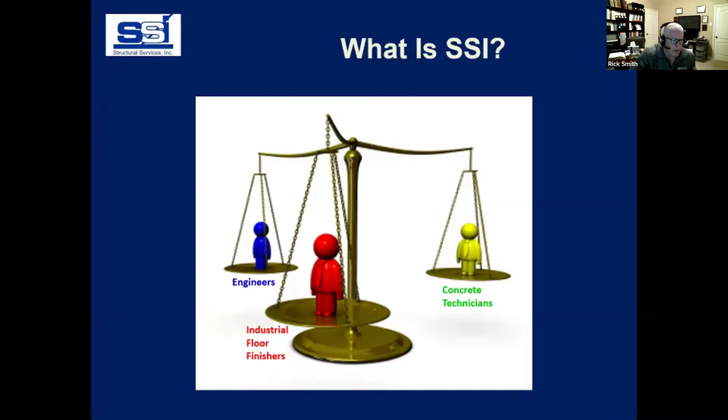We also show up at every project site that we are involved with, so we have boots on the field out there that are working with the floor finishers and learning some of the difficulties that we have with some of our design recommendations, and also some of the problems that we have with other designs. So our clients are numerous. We do 200 million square feet of industrial floor slab design and construction a year, and yet we're a team of less than 20 people. So a lot of involvement there, a lot of long hours and days, and a lot of square footage.

We're involved with a lot of the ACI committees. You can't open up one of the documents in ACI without finding our names out there. ACI 360, Design of Slabs on Ground, is one. That document is a guide. There is the ACI 302 committee, Construction of Slabs on Ground. We're either president or past presidents or chairmen of these committees. 117 on tolerances, we run into a lot of tolerance conflicts in concrete construction, so there's a document that we've served on in the past. And then also a guide for design and construction of concrete site paving for industrial and trucking facilities.

So the first thing we're going to talk about is the anatomy of an industrial floor slab. We've got our base materials that are local to the project site, and then our subgrade. In Ohio, you guys have a 304 material. You're blessed. If I could get crusher run 304 crushed stone everywhere in this country, I would not have near the problems I have, but you would be amazed at the variability in the base materials that are available throughout the United States. 304 is one of the best base materials I've ever worked with.

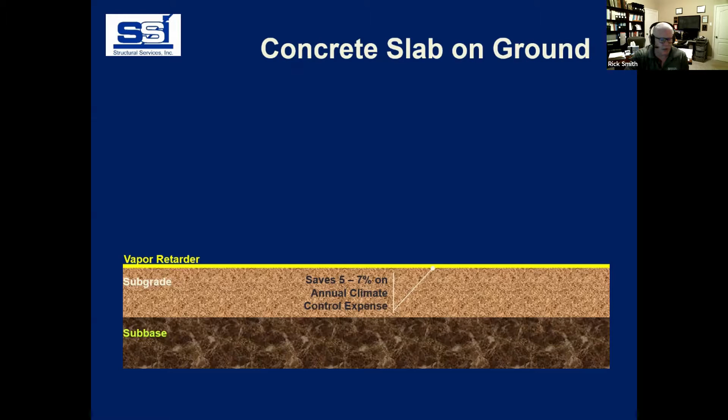Okay Bob, still hearing everything okay from your end? Everything's great, Rick, everything's great. Just want to make sure.

We have our concrete slab that sits directly on top of the vapor retarder. There's actually an ACI flow chart. ACI 302.2R has a current flow chart in it that talks about where the vapor retarder goes in various instances or different types of construction.

With our floor slabs, we have what we call isolation joints. We rarely have an expansion joint in the floor slab, but a lot of people refer to expansion joints in industrial buildings. Isolation joints separate the floor slab from our structural elements like our columns. They also separate the floor slab from our wall system. So we have those in the building.

We have construction joints, which are basically our day joints. This is the limits of our pour for a given placement. And we commonly do pours between 20 and 50,000 square feet. The largest that I've been involved with was 256,000 square feet in one day.

And that was a large project down in Dallas that we did for General Motors.

Then a lot of times we'll see keyways on industrial floors. We wrote keyways out of our industrial design documents probably 20 years ago, but we're still running into a lot of engineers that put this detail on here. Given circumstances today, we had a lot of problems with keyways on floor slabs as far as cracking off of the top side of the female portion of the key. So this was written out of our design documents years and years ago.

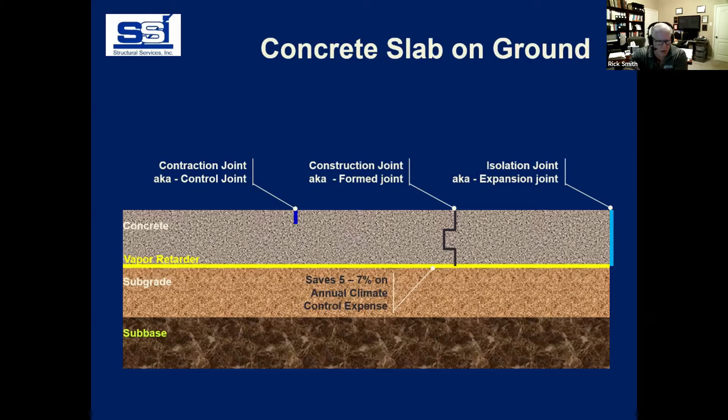So if you still have keyways on your structural drawings and details, we need to get those scrubbed off. Then we also have something called a contraction joint. We used to call them control joints, but that implies that we know what we're doing on concrete construction, and that may be a stretch sometimes. So we changed that terminology to contraction joint, because when we say control in a court of law, then the attorneys jump all over that, and contraction was just a much better way of saying we're trying to accommodate some of the shrinkage. If God's smiling on us and we do everything right construction wise, then we get this joint crack. So basically it's a straight crack that we can resaw this joint with a special saw to clean the vertical faces and fill it with a semi-rigid filler, which is the cheapest way to fix a crack in the floor slab, if you will.

If we don't do it right, then we get some of these things called out-of-joint random cracks, and that's typically what our clients complain about. Random cracks are misunderstood in our industry. If you do them right, in other words, if you over-reinforce the floor slab and produce numerous tightly spaced cracks, that's not a bad design. It's just cracked, and a lot of our clients, especially retail clients, just don't like to see cracks. So we'll talk a little bit about that when that may come into play.

Let's drop all this stuff out of here and let's talk a little bit about the components of the floor slab from a structural perspective. All industrial floor slabs subjected to traffic should have some type of load transfer mechanism in there. First, we have a load transfer mechanism at our formed construction joint. And then secondly, we generally have a load transfer mechanism at our sawn contraction joints. Now that can be a dowel basket or it can be light reinforcing steel.

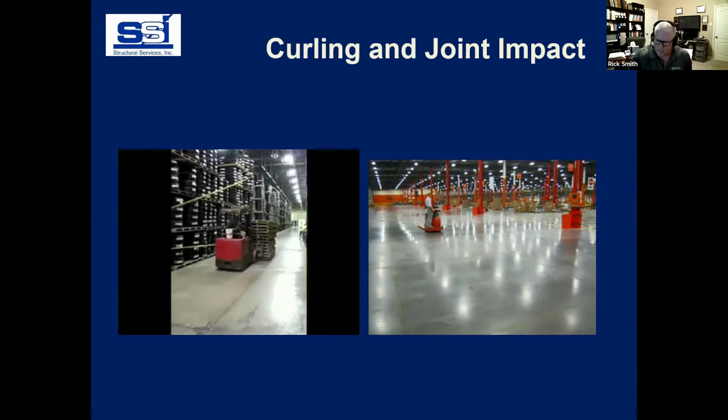And one of the reasons why I wanted to show this - did you hear the clicking noises? The clicking noises are those lift trucks going over the joints. In the first video that was running, the floor had no load transfer in it. So all the joints were faulting and the lift trucks were riding over the joints. The slab was compressing on one side of the joint and it was hitting the bump. The operator was seeing a very poor ride. On the second one, we actually had a pallet rider that was running over the floor slab, and that pallet rider was destroying those joints within 7 months. So it's very important that we have positive load transfer in those floors.

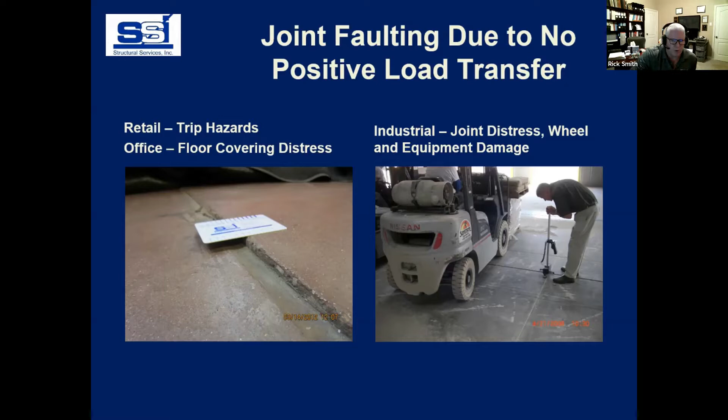When we look at floors, obviously an unreinforced floor with no load transfer is the least expensive project to build, but it's the most expensive to maintain. So it's very attractive for speculative warehouse construction, for developers that are out there trying to hit a lease point as far as leasing the building, a cost per square foot.

But you can see the kind of problems that we run into. We get a sophisticated material handling client in one of these buildings, the joints end up getting beat up. We end up with corner repairs in the form of structural nosing repairs, and we end up with wide joints in the floor slab that start to widen out.

Then we have repair contractors that use the wrong type of joint fillers to fix those. And if they do use the right type of product, like a structural nosing repair, honor the joint with a semi-rigid filler, which is the photo on the left, then you end up with a very expensive repair. These repairs will run $30 to $60 a lineal foot.

On the right, we're actually showing that type of repair, a structural nosing repair that was done to the joints that were spalling. If you notice the arrows pointing to the pins, those are actually ports that were used to permit the undergrouting to occur. So this particular floor slab had 3/8-inch pilot holes drilled through the floor, alternating, and they pumped in a two-part modified foam to basically expand and reconnect the bottom of the floor slab with the top of the base materials.

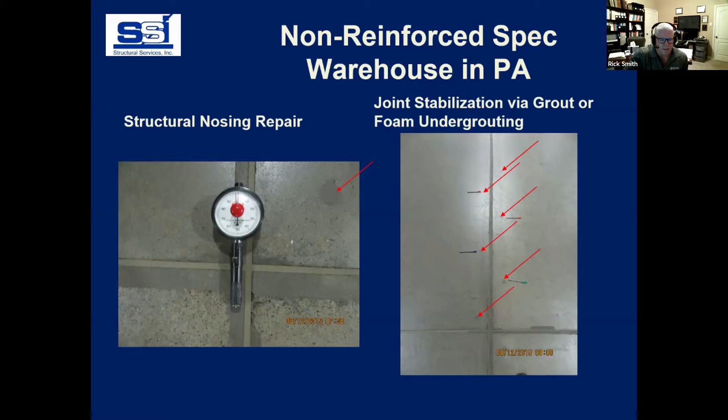So if you do the floor slab improperly as far as the design work, you can add $1 to $2.50 a square foot to repair those floor slabs.

So many times those floor slabs, we talk to clients and they say, well, dowel baskets are too expensive, or nominal reinforcing is too expensive. And we'll say, well, how much? And they'll say, oh, it adds 50 to 75 cents a square foot. And then we say, well, we're looking at $1 to $2.50 a square foot to repair the floor slab downstream if we don't do that.

So be very careful when you're looking at these first costs and comparing your options, because it can be very, very expensive to repair in the future.

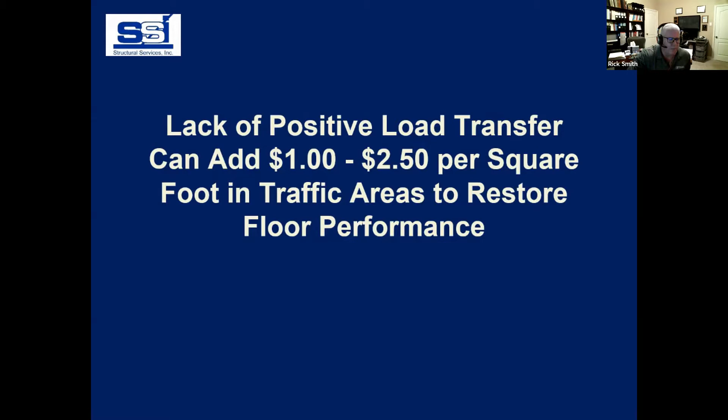If we use dowel baskets in the floor, I always stake them. I never allow the contractor to plop these things, and you'll see here the ready mix concrete hitting the top of the base. Any dowel basket that's in that path is going to basically float like a surfboard, or get moved like a large wave hitting somebody standing in 4 feet of water.

So we always want to stake those baskets. You can see in the photo on the right they have spray paint and string lines down to align the baskets, and the baskets are staked.

The other thing we do is we never cut these tie wires. There's been a little controversy about that in our industry - are those wires too much restraint? I can tell you they're not, on an industrial slab that's got joints that are 15 feet on center or less. We've never had a problem with those restraining activation of the saw cuts.

Leave them in. That keeps the basket properly aligned, and it also prevents those plates or round dowels from falling out. So here on the left, I got called to a project in Tracy, California, where 45% of the joints in the speed bay were unstable, and the floor had baskets in it.

When we ran ground penetrating radar across the floor, we found 45% of the joints where the basket was not in its right location. So you can see the saw cut up here at the top where the arrows are pointing, and there's the basket that's about 3 feet away.

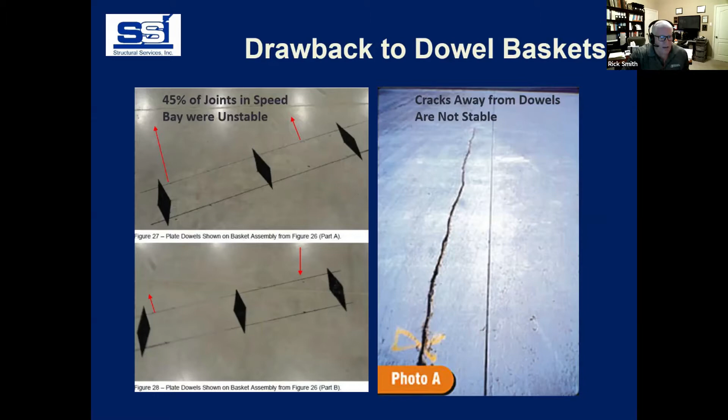So we spent a lot of money putting the baskets in the floor. They didn't stake the baskets - they just poured right over it, and the baskets slid. And when the baskets slide and misalign, then you've got a risk of getting the crack outside of where the dowel is. And now you've got a crack in the floor slab with no load transfer stability. So that's always a risk.

Another way we can put load transfer in a floor slab is nominal reinforcement. ACI 360 gives us a couple of options for that. Anytime we nominally reinforce the floor slab, notice I'm toggling here showing the construction joint widening if I put that in there. Reinforcing does nothing until the concrete cracks. Once the concrete cracks at these saw cuts, it's going to hold the saw cuts tighter than a floor that does not have reinforcing in it.

As a result of that, it sends a disproportional amount of shrinkage to the formed construction joint. That's called a dominant joint. So this joint at the saw cut may open up. Initial opening will be 1/8 of an inch due to the saw cut, and maybe an additional 1/16 to 1/8 of an inch of movement. And then this construction joint can actually open up 1/2 to 3/4 of an inch in width. I'll show you that in a minute.

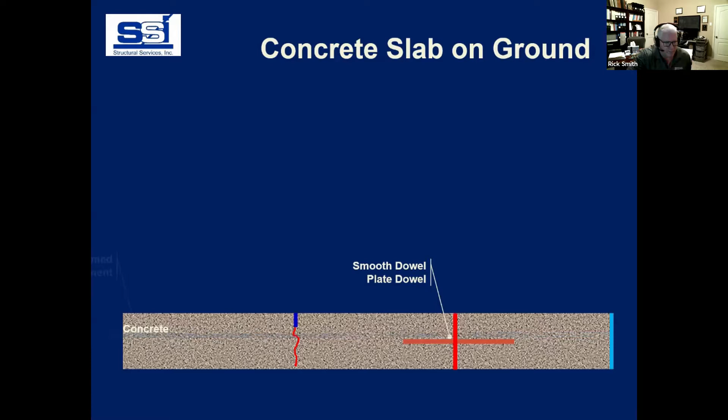With fiber reinforcement, it's a very similar function. Whether this is high volume polymeric fibers or steel fiber reinforcing in 40, 50, 60 pound per yard dosages, once you put that amount of fiber in the slab, you're basically putting little tie rods across these in-joint cracks, and you're forcing that movement to another location in the floor, here again, the formed construction joint. So we've done a great job eliminating restraint in the floor slab, but it's come at a cost, and that's these joints that have opened up.

Just want to illustrate some of the problems we've had in the past with buildings where we've had dominant joints. This is a large warehouse out in Pittston, Pennsylvania. One thing I'll tell you about Pittston is they have limestone you can import from the Philadelphia area that has low shrinkage characteristics, but they also have sandstone in this market that's the predominant material. The sandstone has about twice the shrinkage that the good limestone has. So unfortunately, we ended up with a spec mix with sandstone, high water demand, and high shrinkage characteristics.

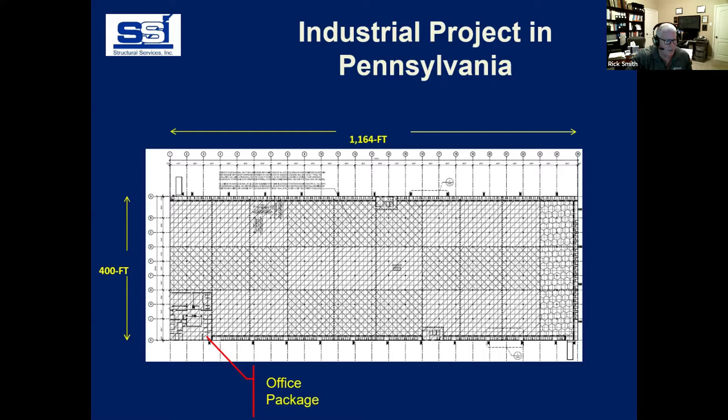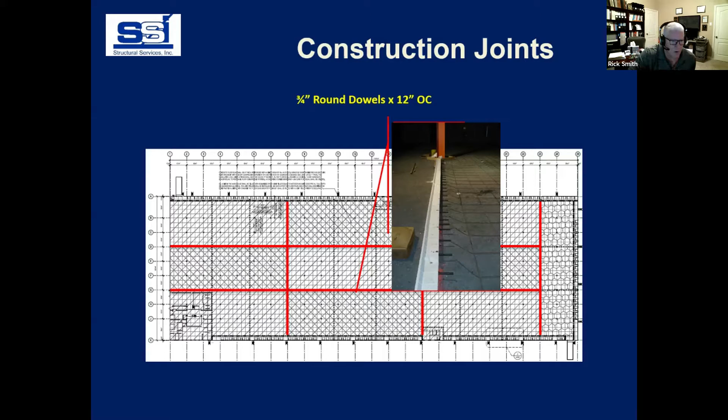So the building itself was laid out into, let's see, 10 placements. These red lines here are construction joints. We poured these left to right across the building. At all these red lines, we had dowels, 3/4 inch round dowels, and they used a system called a laser form, which is a partial depth form. Not a big fan of these types of partial depth systems myself, but the contractor used it and it was okay.

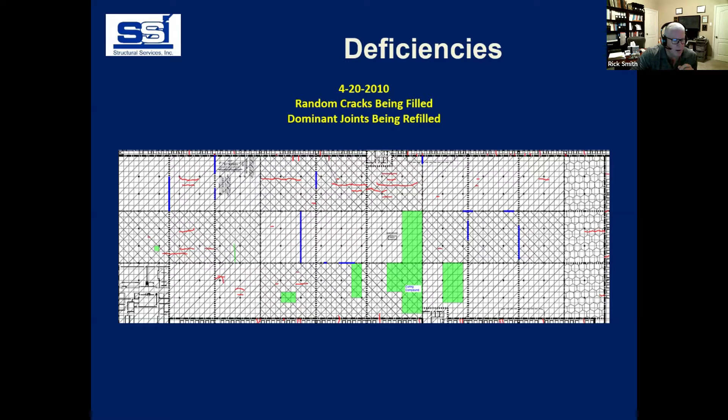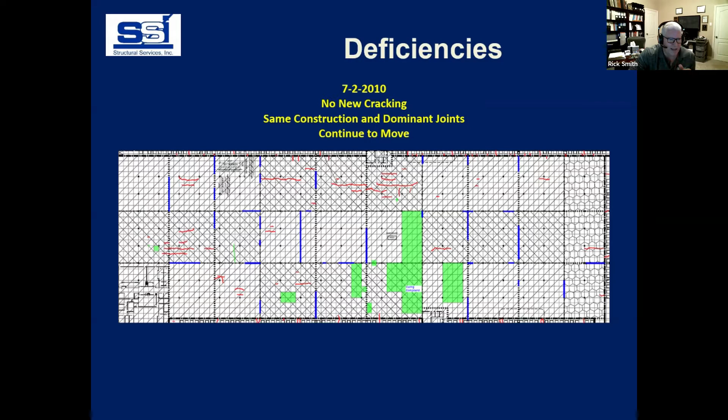But then we started seeing these areas with the blue where we started getting what's called dominant joints in the floor slab. And every 3 months or so, I got called back to the site again, and I had to continue repeating my visits until basically every dominant joint in the floor, every 125 feet, had opened up. We went in and filled these joints in the summertime, sometime around August. And after we filled those, I got called back in to troubleshoot the joint filler that was actually extruding out of the floor.

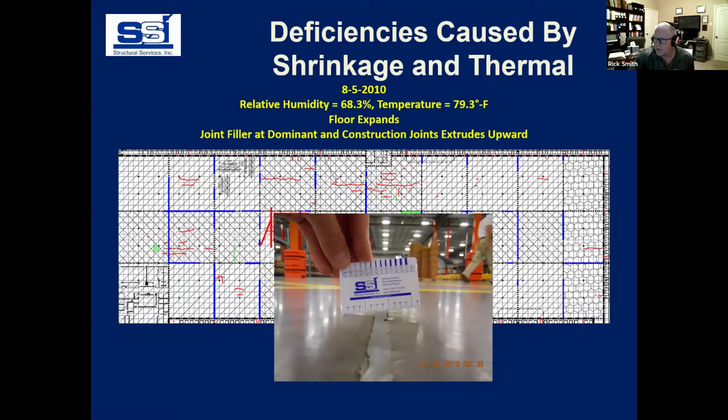So what we found is that the sawn contraction joints opened very little. Then any type of thermal warm-up that the floor slab experienced all channelized to one location every 125 feet. That caused the semi-rigid joint filler we put in the floor to bulge out of the floor, where the lift truck was more than happy to come in there and shear it off. So be very careful about discontinuing your reinforcing in a nominally reinforced floor slab. You can run into some significant challenges with that.

Also at the construction joints, which are these purple lines running here, we ended up with joint filler that sagged and dropped, and we ended up with some wide joints that curled. We had to come in and grind those down.

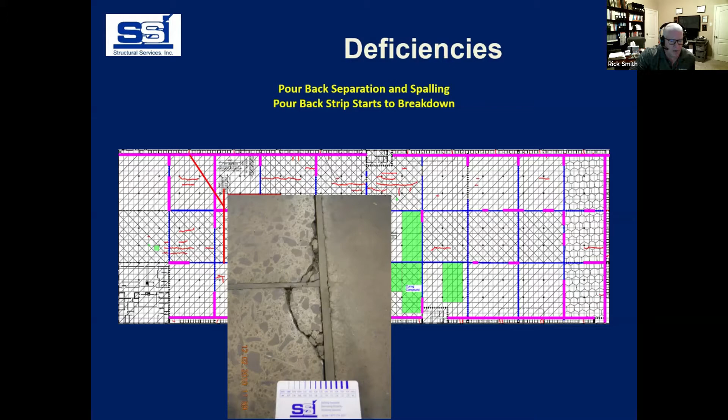You can see the lippage that was occurring here, and then we started to see joint spalling. All of this occurred within 1 year of this project going live. You can see here the joints are actually half an inch in width. So we had two forces at play.

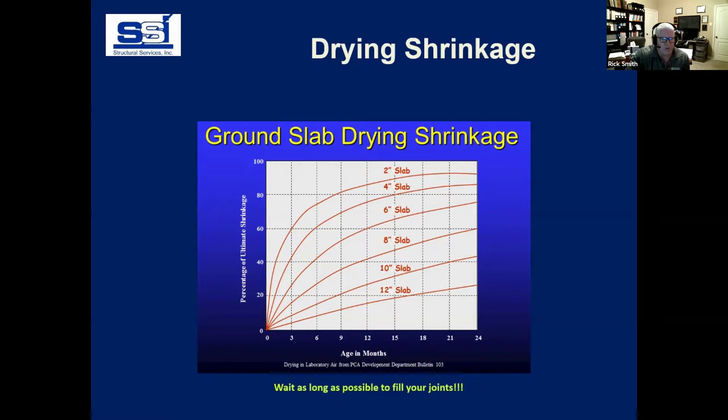We had drying shrinkage in the floor slab, which takes years to release in an industrial floor. For an 8-inch thick floor slab, we might be looking at 40 to 42% of the drying shrinkage in the first year, and then perhaps 60% after 2 years. It starts to tail off after that, but in the first literally 6 months, we see a lot of that shrinkage occur, and then it just slows down. So give yourself some time and do not expect that you're going to fill these joints one time. This is a multiple step process.

The second component we were facing was thermal. The one thing we cannot fix with any shrinkage reducing admixtures or any of this technology out there for limited joint floors is we can't change the thermal properties of the concrete. It's going to expand and contract based on the type of aggregates in that concrete and where you're located in the country.

I've probably got more floors instrumented in this country than anybody as far as slab surface temperature, humidity, dew point, and ambient temperature. I monitor these buildings from time to time and go look at the readings. You can see here in Jacksonville, Florida, the temperatures range between 62 to 83. Then if you look at Florence, it's somewhere between 60 and 74. It's a 14-degree delta between those two, almost a 20-degree delta from Jacksonville.

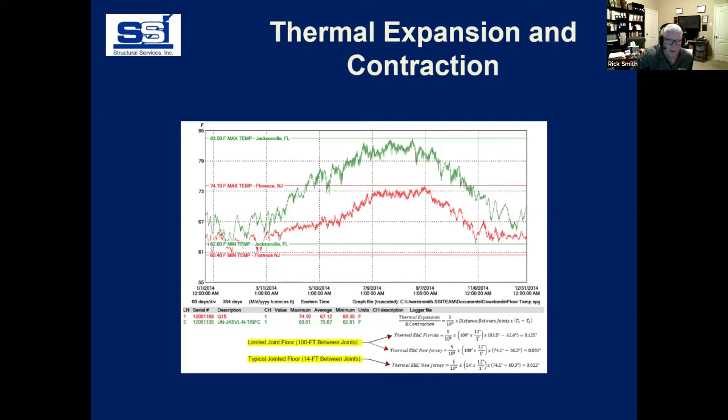So that thermal expansion will release between your joints. If your joints are 100 feet apart, it could cause an eighth of an inch movement. If your joints are 14 feet apart, maybe 12 thousandths of an inch movement. So thermal becomes a big player when you're doing limited joint floors.

ACI doesn't cover a lot of this in our committee documents because we assume you're saw cutting those slabs 15 feet on center or less. Here's the old rule of thumb: 24 to 36 times the depth of the slab, and joint your slab accordingly. When I was in the steel fiber business, we commonly jointed slabs 25 and 30 feet apart. And did I get into trouble?

So we have a lot of people coming at us saying, hey, we want to get rid of the joints. We understand this is the hot thing to do in our industry. How do we do that? Here's a floor slab with 50-foot columns, 12.5-foot joint spacings.

Then you start to look at your shrinkage over the 50-foot versus your thermal over the 50-foot. Here again, you've got your 50-foot column spacing, looking at shrinkage, which might be about 0.4 inches, and thermal, which might be 0.04 inches. Then you look at maybe going 150 foot by 150 foot. Now you're looking at over 1 inch of shrinkage and an eighth of an inch of thermal contraction and expansion.

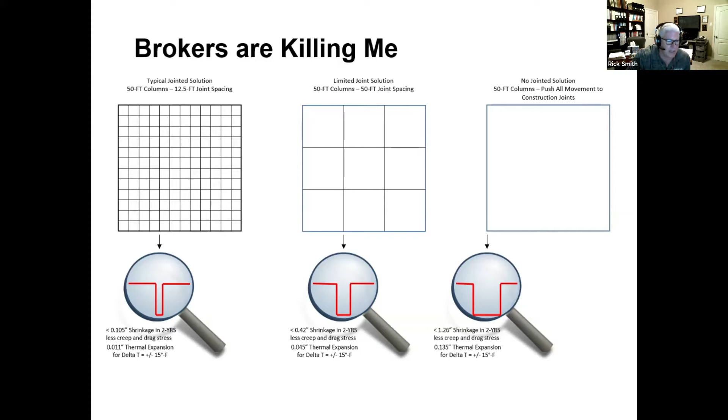Now, the shrinkage eventually is going to slow down and stabilize, but that thermal expansion and contraction will never stop unless that building is climatized, meaning held within about a 3 to 5 degree delta. So be very careful here, because with a tightly jointed floor, we may have to fill a little separation that occurs, and that's eventually going to go away after 2 years. But with these wider joint floors, 50-foot and 100-foot spacing, you're going to have movement that will continue to occur and release at those joints.

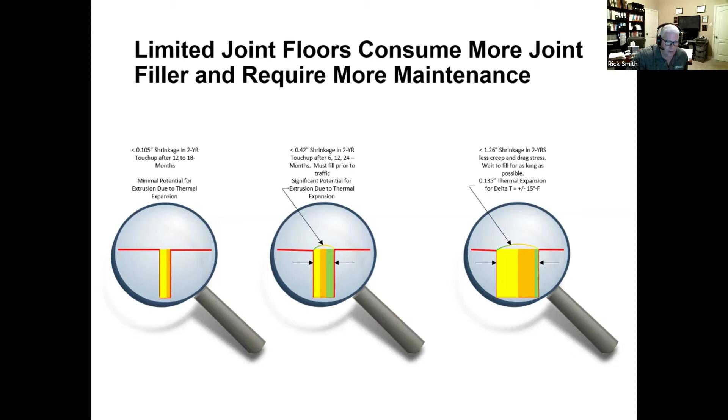So you want to put those joints in areas of the building where they're not going to see traffic, or you need to be prepared for that if it occurs. Okay, so we were talking about reinforcing. Let's talk a little bit about how much reinforcing.

Well, the buildings are getting taller, but we generally don't size reinforcing for the thickness of the floor slab. In other words, if the loads are increasing, I don't change the amount of reinforcing that I'm putting in there for a 6-inch slab.

So as we see the buildings hitting 36 and 40 feet clear, the number of pallets you can put in those racks increases. And we're commonly seeing, and I've been running these stress calculations now over 30 years, 7 and 8 pallets put in these racks. And we've got forklifts that'll lift them up that high.

A lot of our clients design their floors for 2,000-pound pallets. And at 2,000 pounds, you're just not going to see 6 and 7-inch floors out there that'll carry those loads anymore. So the new standard that we're typically seeing is an 8-inch slab with about number 3s at 16 inches on center in it, or an equivalent 8-inch slab with dowel baskets or something similar to that.

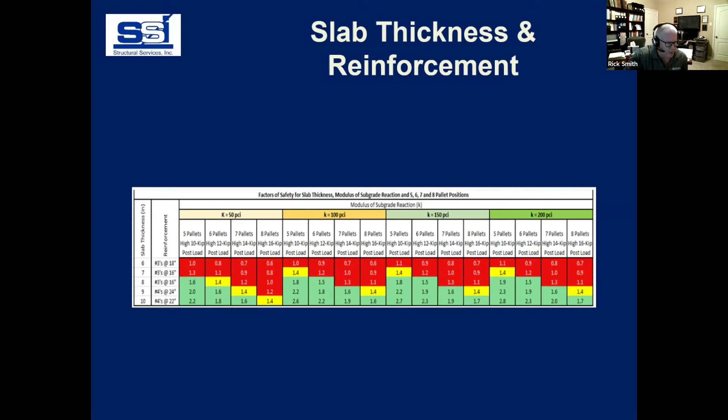But ACI gives us guidance on what to do if we're using light reinforcing, this 0.1% steel that you see, or number 3s at 16, number 3s at 18. It tells us to joint the floor slab 15 feet on center and put that reinforcing steel in the floor and locate it at a position where you're not going to saw cut through it.

ACI also gives us guidance on how to produce limited joint floors that have no saw cuts, purposely installed saw cuts, but are designed for serviceability. So basically a floor slab where we want millions and millions of tiny, tight little cracks in it. And there it tells us to go to the 0.5% cross-sectional area steel.

What ACI doesn't tell us is what to do in between. There is no guidance in our committee documents that says what to do if you're using between 0.1% and 0.5% steel. So we call this the courthouse zone. And we commonly run into floor slabs that are designed with code minimum reinforcing, 0.18%, and these are right smack dab in the middle of the courthouse.

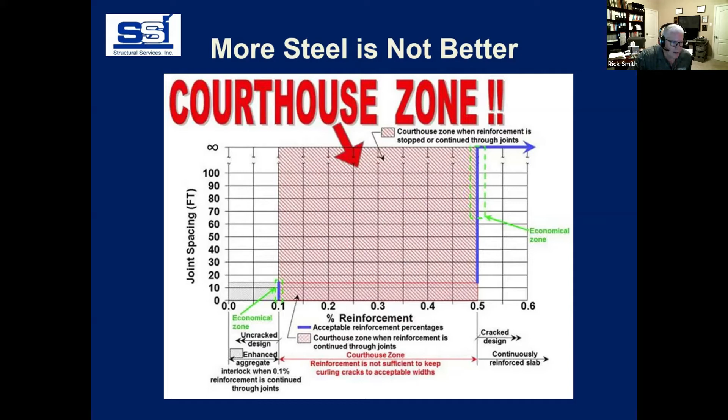Here's an example of what happens in a courthouse floor. Number 4 bar, 18 inches on center in a 6 or a 7-inch thick slab. The saw and contraction joints never activated. You can see that the reinforcing steel was jacked up in the floor slab just a little bit, and they got some settlement cracking over the bar. You can see where every rebar is in that floor slab.

Now, the good news is we'll never have to refill these joints. The bad news is sawing out and filling these cracks will run anywhere from $9 to $15 a lineal foot. So it gets very, very expensive. And this entire floor slab, 1 million square foot, had 16 miles of out of joint random cracks in it. So you can do the math yourself.

So limit the amount of reinforcing steel to less than 0.1% if your intent is for that saw cut to activate. And if your intent is to get rid of the saw cuts, jack it up to that 0.5% reinforcing steel and do away with them. But stay out of the courthouse zone.

Okay. Anytime you reinforce the floor, you force that disproportional amount of movement to the construction joints. This is a tilt-up building in Dallas, Texas, with a vapor retarder poured under a portion of the building. I've got lateral load path steel connected to the tilt-up panels in this first bay. So all the movement that was occurring in that first 100-foot wide pour released at this construction joint right along column line 3. And it opened up 13/16 of an inch in width.

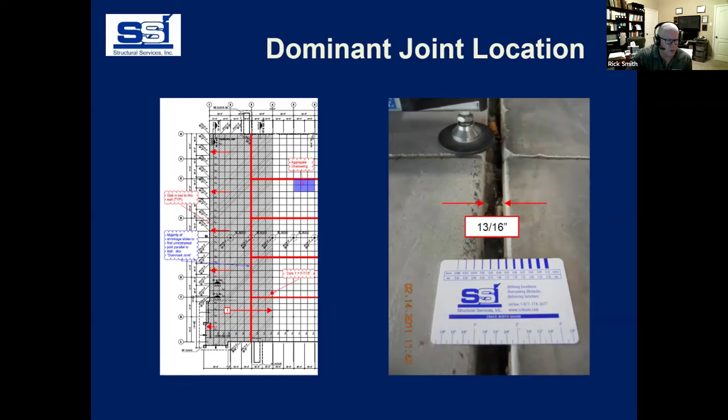I do not have a joint filler on the market I can stick down in that floor that is going to take that expansion and contraction and then that additional shrinkage that's going to occur over a time frame. So I'm forced to go in there and rebuild those joints with a structural nosing repair material at a cost of $30 to $60 a lineal foot.

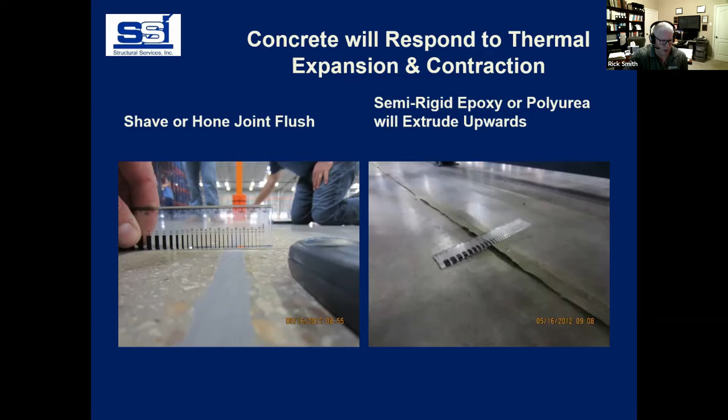So that's what we ended up doing on portions of this floor after we tried numerous times to fill the joints with different products. And then we saw that joint filler actually extrude up out of the floor. For that reason, we developed what we call the hybrid joint. Anytime I do a reinforced floor, I lightly restrain the construction joints with a little bit of reinforcing steel.

So if I've got plate dowels in the floor slab, 24 inches on center, I alternate those plate dowels with a number 3 rebar to basically force the shrinkage back into the saw and contraction joints, and a little bit of that shrinkage can accommodate itself at the form construction joint.

So we've been doing this for the past 6 years on every one of our big industrial projects, and it's working lovely. I've had 4 failures to date. We understand why the failures occurred.

We allowed some of the engineers to space these out 36 inches apart. That was too far apart. We overstressed the bar and snapped it. And once you broke one rebar, it was like a zipper. It went down the entire construction joint and the joint overactivated.

But this joint has been working very well for us. It's used on all the Home Depot, Amazon's large distribution boxes that we have out there today.

As I said, you can over reinforce the floor with 0.5% steel. We do that when we're pouring F-min floors or super flat floor slabs. We don't want any saw cuts in those because we don't want any curling at the joints, and we want that floor to have perfect rideability.

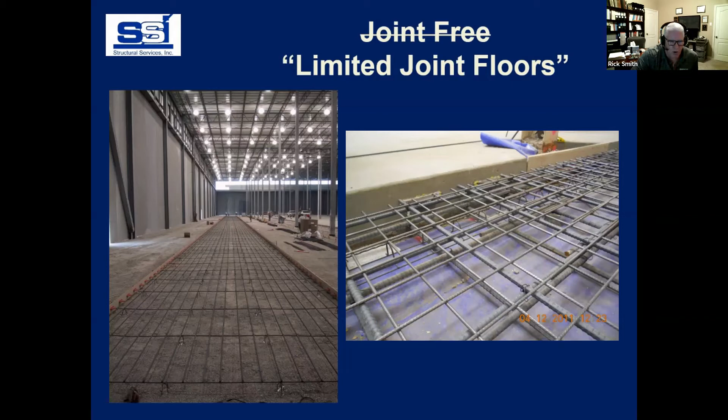Longitudinally and transverse, or left to right over the wheel path. Also, we get involved in floors that are heavily reinforced if we've got steel wheels or very, very hard wheels on the floor and we can't get in there to maintenance the floor.

So here's an F-min floor on the left where we can see the forklift is extended, and what we're trying to do is prevent that forklift from running into the racks. So we have that floor poured very flat and very level.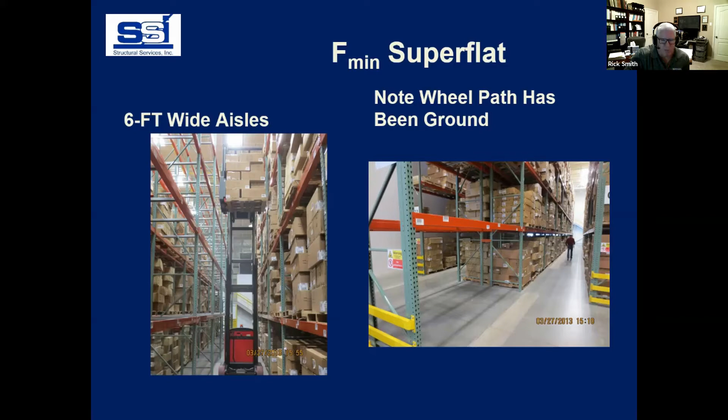And then that same floor over here, you can see the grinding marks that were done in the aisle to bring that floor in compliance. For those of you in pavement design, you might call that IRI, your international roughness index. We use the same type of equipment that you guys use to measure those floors. It's called a profilograph.

As we get into these taller buildings, one area that we're getting into trouble with are overturning moments. And as these buildings get taller and taller and taller, we're seeing very high uplift forces in these floors, especially in high seismic areas. So something I just want to point out to you.

A lot of our clients come to us and they say, hey, we want these racks to be designed for 2,000-pound pallet loads throughout, or 2,500-pound pallet loads. And so we'll ask the question, how many of these pallets do you receive on a given day that are going to be that heavy? And well, that's a good question. So they'll go back and they'll do the math.

So here's a building where over 5,000 pallets that are received are between 1 and 600 pounds. And then only 23 pallets out of all the pallets that came in there were between 2,600 and 3,000 pounds, and only 62 in the entire building were over 3,000. So we're like, why would you design the floor slab for a 2,500 or a 3,000 pound pallet load if the majority of your inventory was in the 1,000 pound pallet load or less?

So be very careful about that, because these particular floors with these high uplift stresses can require 8, 9, and 10-inch thick slabs when we only need 7 or 8-inch slabs to carry it.

So if we know that we're going to have these heavy pallets, ground stack them. So instead of putting them in the racks, we put some labels on the racks to basically say any pallet that's over 2,500 pounds goes on the floor, not into the racks.

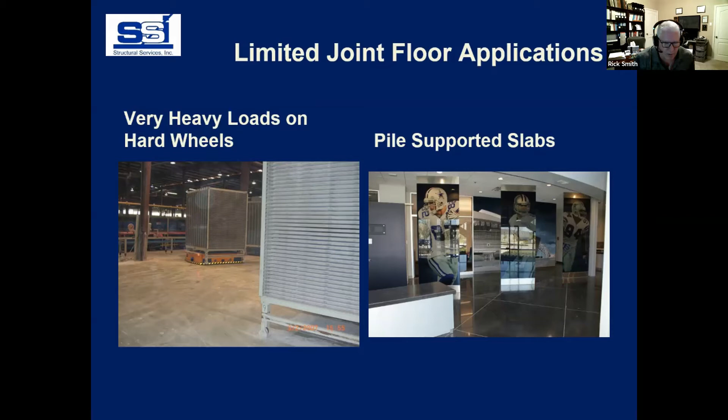Another thing that we're running into are ground improvement sites. Floors that are built on controlled modulus columns, stone columns, wood piles.

These types of floor slabs need bottom reinforcing so we can span between pile to pile or rigid inclusion to rigid inclusion. We load this type of floor slab up, and this particular floor has number 7s at 10 inches on center. It's got 65 pounds per cubic yard of steel fiber reinforcing.

We use a special joint along our free movement joints that is basically shaped like a sine wave. That joint's allowed to open, and there's a stay-in-place keyway, a metal keyway, designed for load transfer that I can rest my semi-rigid joint filler on. So we're seeing a lot more of this type of design coming out, especially where we're getting into these ground improvement sites.

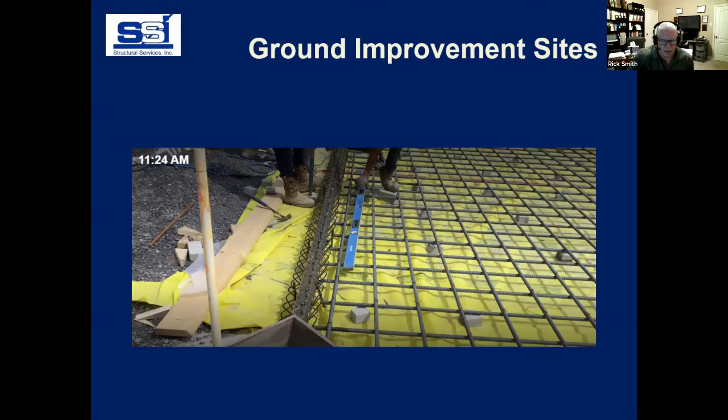And of course wouldn't be complete if we didn't talk about one of the largest e-commerce companies in the world. This is an Amazon industrial floor slab. We do all of the Amazon projects.

The slabs on ground are poured normal with joints in the floor slabs, but the suspended slabs are heavily reinforced. Beams on an 8 to a 10 foot spacing with an 18 gauge, 1.5 inch deck, 6 inches of concrete, 4x4 D11 to 4x4 D14, I think is about the biggest that we've gone on these. And then 7.5 pounds of macro synthetic fibers per yard of concrete to help control the cracking on these decks.

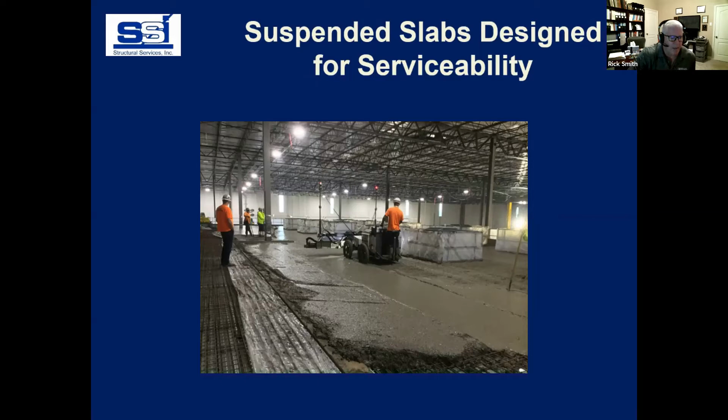And actually when we pour these, this is our expansion joint here. We actually pour right across the expansion joint with a fake wood form in it temporarily, come back in and cut that form out. Then we come back and put in a Watson Bowman armored joint there.

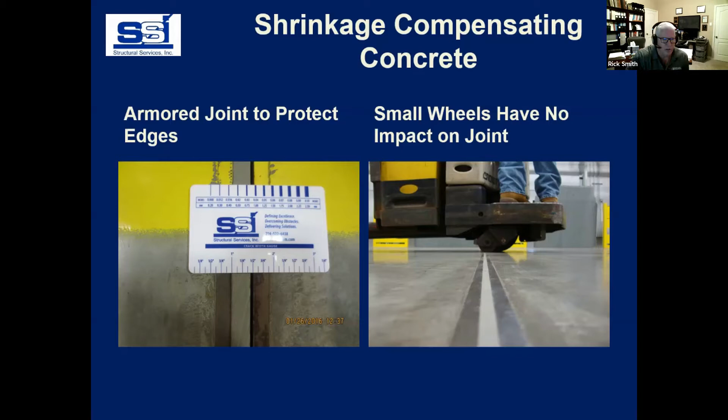Anytime I do a limited joint floor, I like armored joints. Armored joints are traditionally used in shrinkage compensating floors. You typically have very small wheels running on these floor slabs, which is influencing owners to get rid of the joints, because these small wheels are very problematic for jointed floor slabs if the joints are not properly maintained. The armored joints, stay-in-place joints at our construction joints, and now full depth armored joints at what we would call a purposely induced joint at a normal saw cut location.

The contact pressure we have calculated from these wheels is 1,600 pounds per square inch. It will eat a joint up. So if the joint is not properly filled and maintained, it's a major problem.

On limited joint floors, as I said earlier, the biggest drawback is that all that thermal expansion and contraction continues to release at one part of the floor. So you have to go back in and maintain these floors on a regular basis.

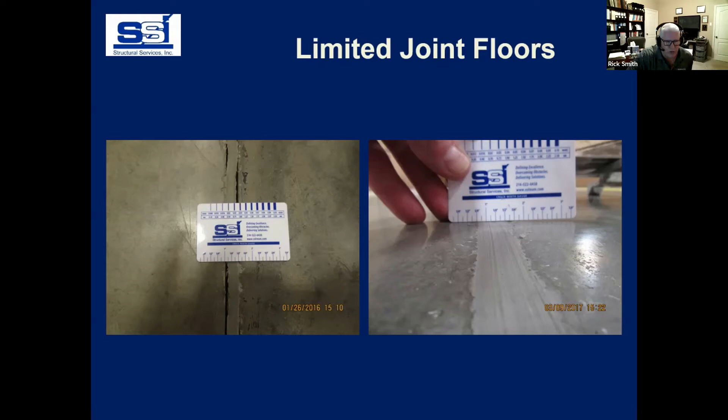So the picture on the left is what I saw about 6 months after the building was completed. And then I went back to the building in March of 2017, over a year later, and they had just touched up the joints. Notice the width of that joint is approaching 3/4 of an inch. It was a 1/2 inch at year 1, 3/4 of an inch at year 2. So you're seeing a lot of movement there, and you have to deal with that thermal expansion and contraction.

Here's how not to do joints. These are also limited joint floors. The contractor, for some reason, put in a 1/2 inch tooled edge on a construction joint, which is a big no-no on any type of industrial floor. If we put an edger in the floor slab to identify the construction joint, we always drop a saw in there and square that joint up before we fill it.

They did not do that. You notice that the joint filler has been smashed down into the joint, so it's not protecting the edges, and the edges are now starting to round over due to traffic. So they've gone in, and here's the original joint filler shown in the right photo - it's in there about a 1/2 inch in width.

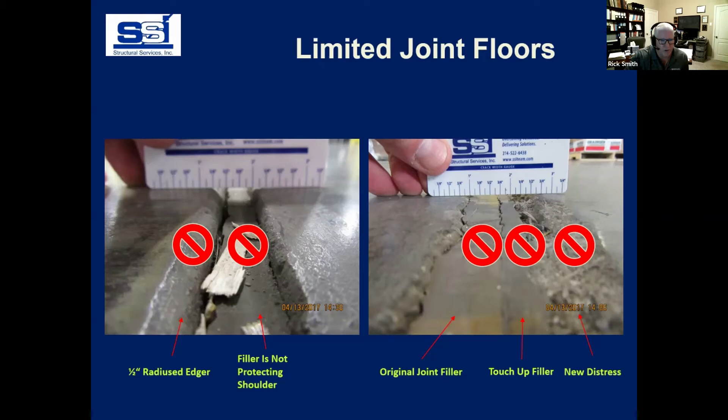Here's the touch-up filler, and now here's the new distress. They need to square the joint up and put new filler in there full depth. And here again, that joint's over 1.5 inches in width now as a result of improper maintenance.

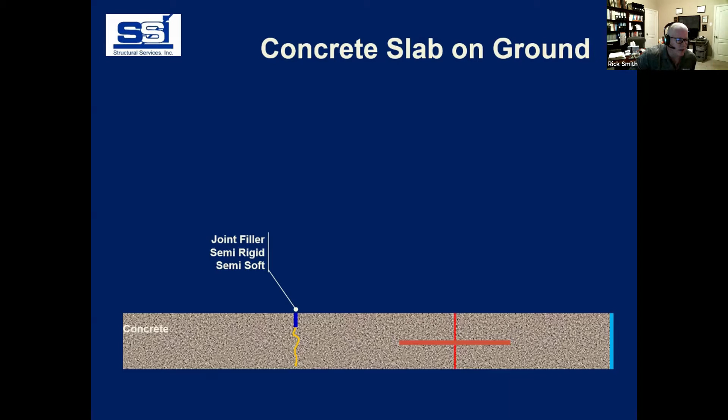On all industrial floors, we always fill the joints. We put in a semi-rigid epoxy or a semi-rigid polyurea in the floor slab.

We may have other factors like flatness and levelness that are specified. Gloss, distinctness of image is another property we can look at, along with slip resistance and roughness. For the Amazon program, we actually designed their floors for gloss and roughness to make sure the robotic units do not spin out on the concrete.

Here's some of the devices we use to measure the floors: a profilograph at the left, a gloss meter, and this BOT 3000E, which tests for slip resistance. Anytime you do polished concrete, where you're going to have a lot of people coming in and out of a building, it's not a bad idea to run this test just to make sure you've got a piece of paper that says your floor is not too slippery.

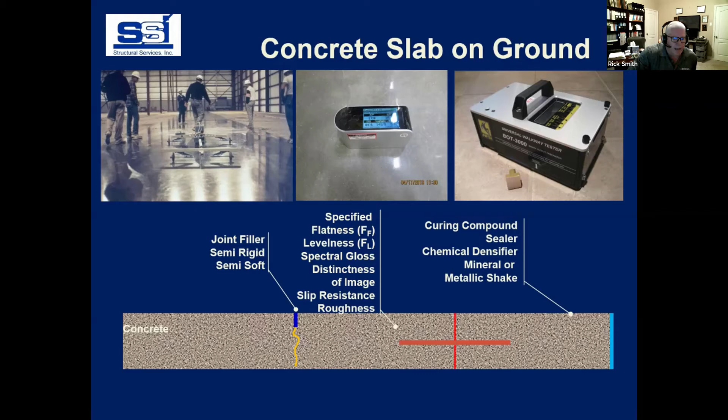The other things we look at are the curing compounds, sealers, densifiers, and dry shakes that may be on the floor. I'm not going to spend much time on concrete mix design, but I just wanted to give you a couple of real quick notes here.

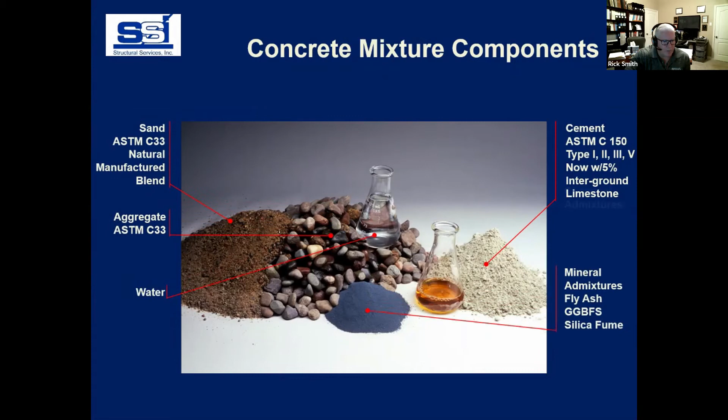One is, make sure you've got enough cement in there to coat the aggregates and the fibers. We can easily make 3,500 and 4,000 PSI concrete, but in the wintertime we need more cement to get set. A lot of times I'll see spec mixes come across my desk that are suitable for summer construction, but not for winter construction. Get the cement in there.

That's your biggest advocate. Make sure you're using the largest well-blended combination of materials possible. If you've only got a 2-aggregate plant, you can't run 1.5 inch stone in there with a natural sand or a blended sand—you're going to end up with problems as far as finishability. So I would drop down to a 1 inch well-graded stone and then go with natural sand. ACI does like natural sand in the concrete, and if you do use manufactured sand, put 30% natural in there to round off those particles.

And then water is not the enemy. I like water. I like a 2.5 to 3 inch slump. Water-cement ratios of 0.47 to 0.55 are extremely common on industrial floor slabs. Anything less than 0.47, you're starving the concrete as far as water. You're dealing with a chemical slump, and those chemicals will create problems for the floor finishers. And then, unlike pavements, no air on industrial floors—less than 3% trapped air.

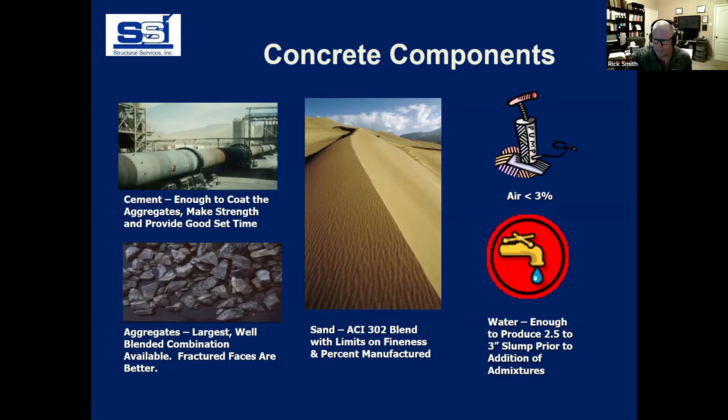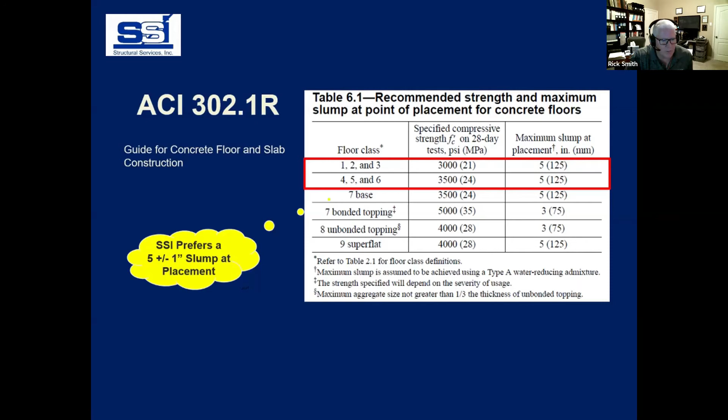So here's a good rule of thumb that was told to me years ago for industrial floor slabs. First, I like a 5 plus or minus 1 inch slump at the point of placement. That's defined by NRMCA as the slump of the concrete coming down the chute of the concrete truck, hitting the ground, or coming down the chute of the truck going into the pump. That's always where I do my acceptance for slump, air, temperature, those kinds of things.

If the contractor wants to slump at the end of the line, I'll be happy to go out there and slump it for him. But compliance, as far as acceptance or rejection, occurs at the hopper of the pump, or as it comes off the truck onto the ground. Very few contractors pour a 4 inch slump, so I'm not quite sure why ACI says maximum 5 inch slump. That's going to come out of the 302 document if it kills me.

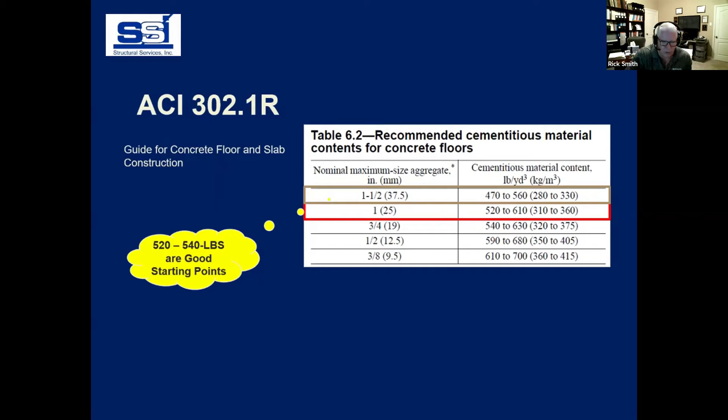Another thing we look at is trying to use the biggest stone we can. But in general, 520 to 540 pounds of cement or cementitious material is a great starting point for our industrial floor slabs. The reason we like good, well-graded aggregates is for what you're seeing right here.

These were 4 cores taken out of a floor slab that was poured at 2 different times. The first slab, core number 4, was placed, and that was 1 million square feet of plant. They added on a 500,000 square foot addition, which are cores 1, 2, and 3.

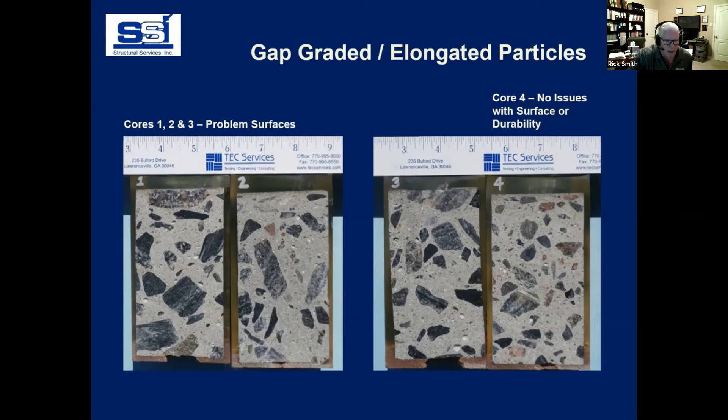Believe it or not, the concrete mix design, the aggregates, everything was identical from the original plant to the expansion. But look at the change in the aggregate grading and fracturing done by the quarry. We ended up on this project with something called aggregate shadowing. They pulled the same mix design, same aggregate source, same concrete supplier, and we still had aggregate shadowing all over the surface of the slab, which led to mortar flaking.

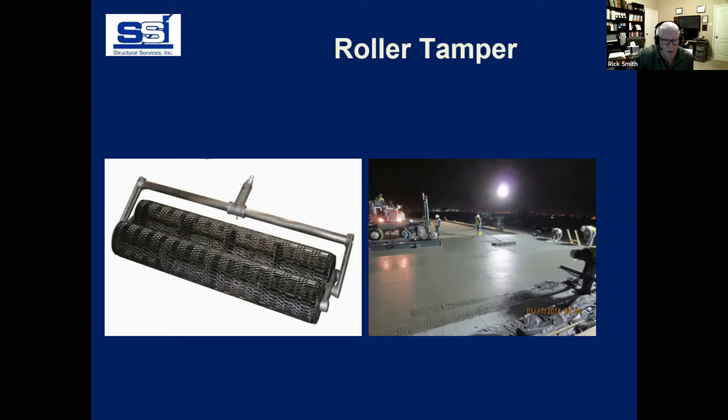Once that started coming off the floor slab, it was a nightmare from a serviceability perspective. So we commonly recommend what's called a roller bug. We laser screed the concrete, and as soon as we do, we run this roller bug out there to push down those large aggregates, then hit it with a channel float or check rod to smooth it out. You can see you get a nice cream up on the surface here. So when we place our power trowels to finish the concrete, there's no more aggregate shadowing. This has saved our keister on a number of large projects.

This project on the left that I'm showing with the curing blankets was actually done up by Troy, Ohio. It was a large Home Depot project.

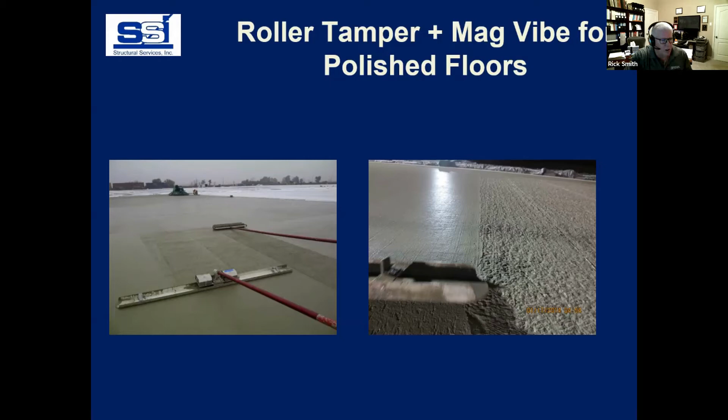I'm going to talk about curling real quick. Differential shrinkage—basically that's what curling is. The concrete shrinks differently on the top than it does on the bottom, and as a result, as it's drying, the slab loses water and lifts off the base.

This is not that far off as far as scale. We typically see curling occurring 2 to 3 feet back from all the joints. If you were to core the concrete and take moisture readings of the base and the concrete moisture at the bottom, it would be darn close to 100%. So whatever the differential relative humidity is top to bottom, that gives you that curl.

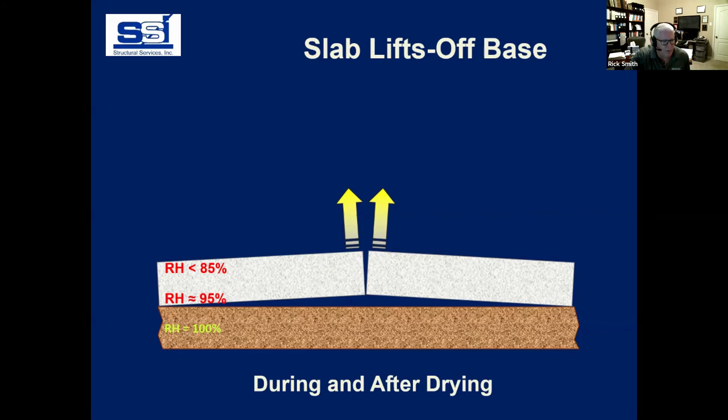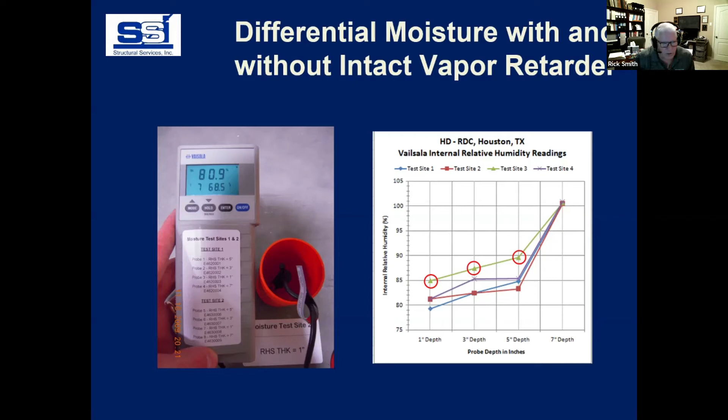I've measured this with internal relative humidity probes. If you look underneath the slab, you're at 100% RH, but just 5 inches down you're at 90%, and 1 inch below that you might be at 80 or 85%. This is why moisture-sensitive floor finishes fail, and why sometimes it takes a while for us to dry out these buildings.

Curling changes across the country depending on where you are. Down in Houston, where we have high relative humidity, even the construction joints don't curl very much. In fact, no saw cuts have curled on this building after 2 years of service. But go up to Eagan, Minnesota, and look at the curling that occurs there.

Those of us who live down in Texas, where it's warm and moist, our skin doesn't dry out like it does when I grew up in Ohio. In the wintertime, when your skin starts to dry out and you get out of the shower and it starts cracking and hurts, that's what that concrete slab is feeling.

In Eagan, Minnesota, we had extremely high curling as a result of the very low relative humidity. Look at these floors—they're not jointed that far apart, about 15 foot on center joints. This one is looking at 0.8 of an inch of curling at every saw and contraction joint.

So this is what curling may look like. You go across the floor slab, you get to the far end. This is why I got in trouble when I was doing steel fiber work—I used to joint the floors far apart, and the panels got so wide that the curling stresses were high, and I got mid-panel cracks.

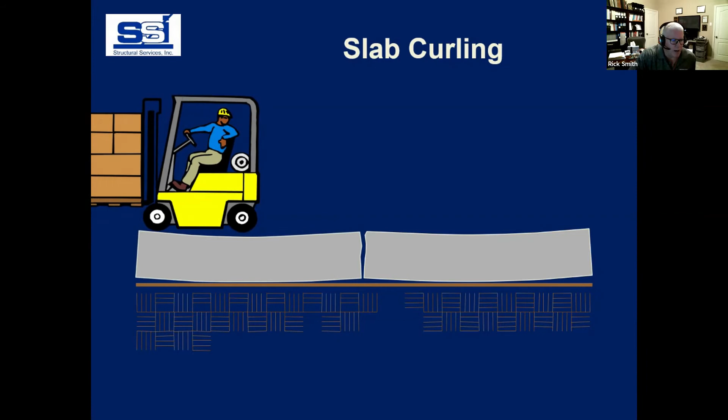I didn't know that until I met Jerry Holland. I actually hired Jerry, when he was with Lockwood Green, to help me evaluate a floor slab that had a bad curling problem and a cracking problem, and he educated me on this whole process.

Here's a building I measured in Chicago 2 years after it was completed. The F numbers initially, when it was placed, were FF50, FL35 and higher. After 2 years of service, curling has developed at all the joints, and the F numbers have decreased. The flatness is now 24 and the levelness is 19.

Notice here on the column spacing, we've got 50-foot columns between M and N, and 60-foot columns between N and P. The contractor jointed this floor at 12.5 feet on the 50-foot grid and 15 feet on the 60-foot grid. Look at the curling difference: 0.2 of an inch of curl over 12.5 feet, but at the 15-foot joints it's 0.4 of an inch—almost double the curling the equipment was feeling. So that creates problems for us.

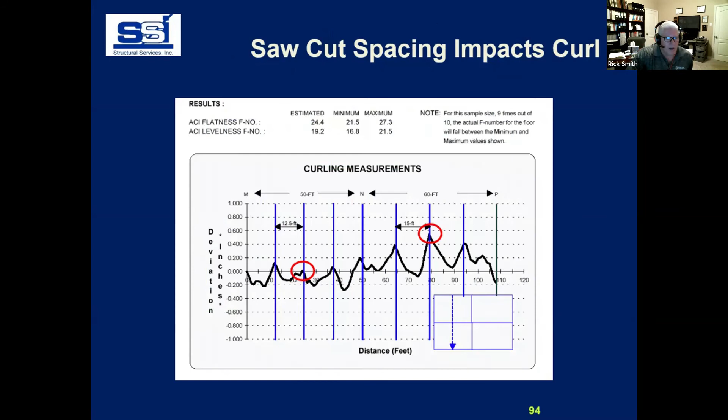A lot of our committee documents currently say that vapor retarders increase the amount of curl. I'm here to tell you that those statements are wrong and unproven. I've actually gone out and measured hundreds of floor slabs with and without vapor retarders, sometimes in the same building.

Like this one here, I've got a small trucker's lounge with 2 bays with a vapor retarder in it. I took a curling profile run 5 across the vapor retarder at the same location on the same pour, and run 6 without it. Comparing those 2 elevation profiles: run 5 over the vapor retarder, the F numbers are 8447. Without the vapor retarder, 5642. So the floor is actually flatter and leveler with the vapor retarder.

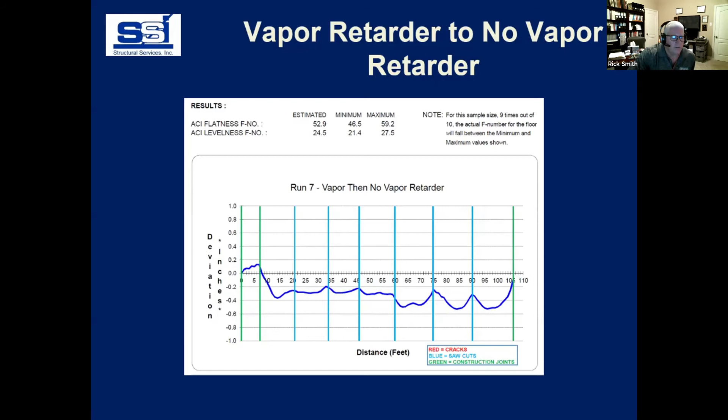Now if we look at run 7, it goes over the vapor retarder to the first bay, then the vapor retarder stops, and the next 50 feet have no vapor retarder. Let's look at what happened there. Here's the vapor retarder from the pour back strip to the first column line at 60 feet. You can hardly see the blip on the radar as far as elevation change, but look what happens between 60 and 105 feet. Now we get that 0.2 of an inch curl and a very defined curling profile. The reason this occurs is the base is at 100% relative humidity.

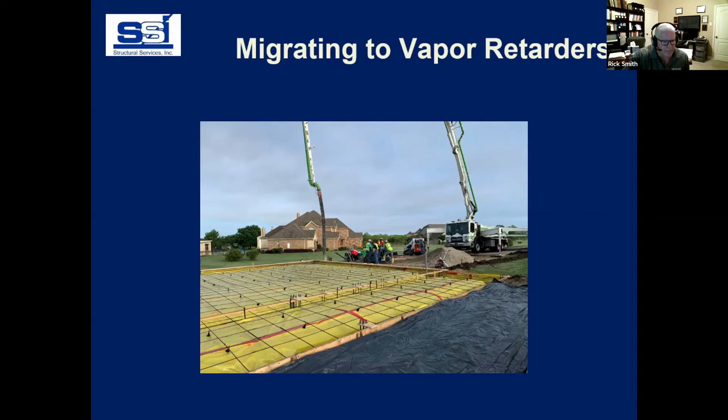Everything I'm talking to you about is everything that I believe in, and many others do as well, but I practice what I preach. This is actually my workshop that I'm getting ready to pour at my house. It's got a vapor retarder in there, a good 10 mil ASTM E1745 vapor retarder. It's got chairs in here holding the reinforcing steel in the right location. Number 3's at 18 inches on center, and that's very common for us.

So we have more problems where we don't have vapor retarders than projects where we do. These are the areas that I'm troubleshooting sweating slabs right now.

Here's the new ACI 302 flow chart.

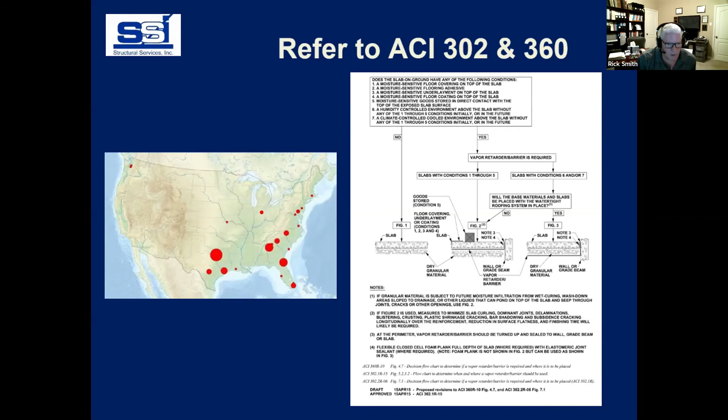If we put in the vapor retarder, we always make sure we put it in the right spot. In this case, they put the vapor retarder over the welded wire reinforcing, and everybody just stood there and looked around and ignored it. But you want to make sure the vapor retarder is actually below the reinforcing steel. That would be a good start.

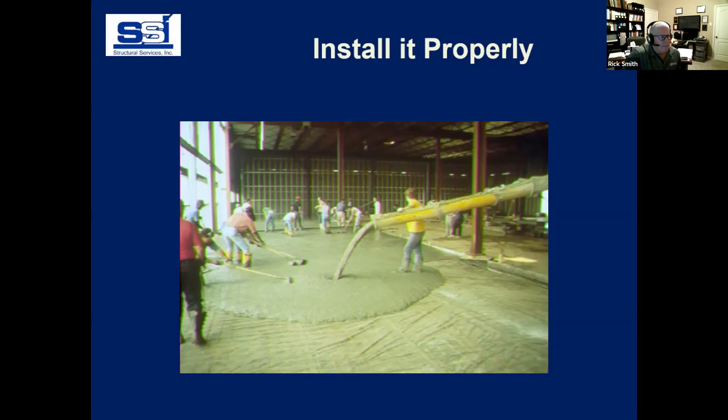Other ways to mitigate sweating slabs: large destratification fans to help push the warm air down to the floor slab to warm it up so that it's higher than the dew point. The last thing I ever want to do is shot blast the floor and open up the pour voids. That's just going to be an abrasion resistance nightmare for us, so be very careful about that.

People will say, well, let's do the concrete fuzzy. Anytime you lightly finish the concrete, you're going to see more abrasion issues, especially if you get the wrong type of lift trucks in the building. I prefer to resolve the problem with some type of an avoidance system that's interlinked with our exhaust fans, basically burp the building or blow out the building when I have periods of low humidity.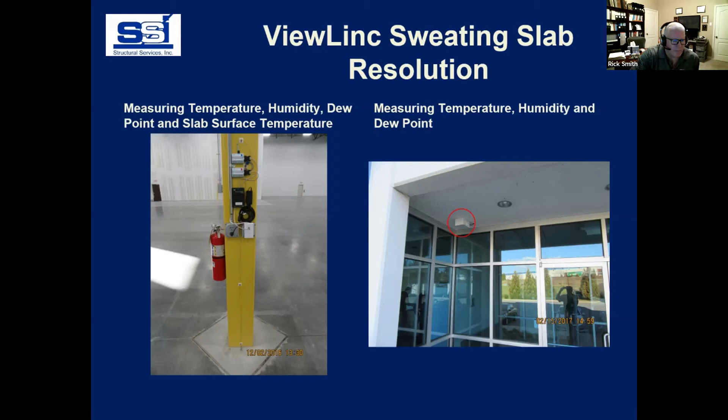I want to tell you it's 0.1 pounds per square foot. Once you hit rates of evaporation higher than 0.1, you better start deploying Confilm, Eucobar, or some other type of monomolecular film out there to keep that slab from evaporating too quickly.

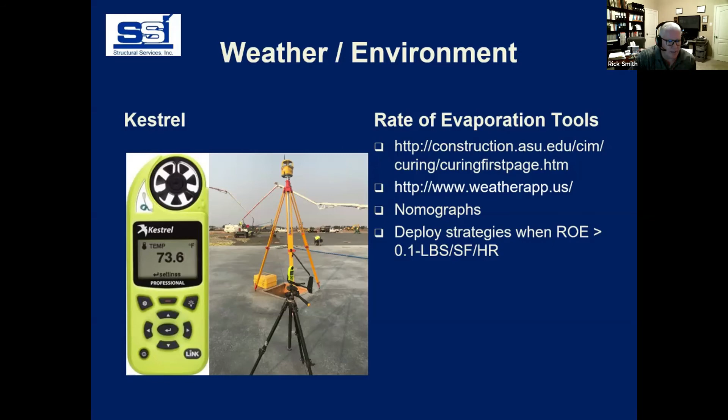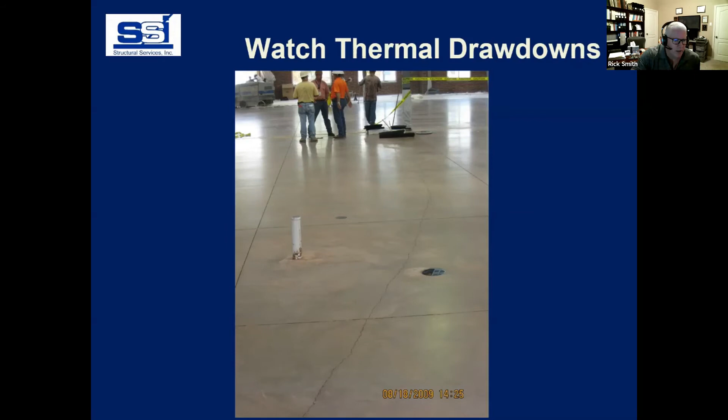Another thing to watch out for is thermal contraction. We place a floor slab in nice warm weather, and then all of a sudden somebody forgets to shut down the building over the weekend and we get a cold front. The cold front contracts the concrete and it pushes up against steel or something and it cracks. So thermal shock creates a lot of problems for us.

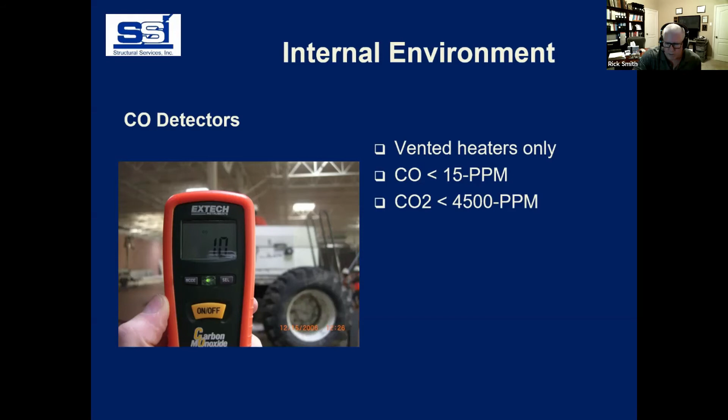And then finally, watch your carbon monoxide. We limit the carbon monoxide to less than 15 parts per million when we're pouring concrete, to make sure we don't carbonate that slab, which is a permanent defect.

Thank you, Amy. So as you're looking at this, this will affect your moisture sensitive floor finishes. If you're trying to fast track those and get them on a building, you want that concrete to dry out quicker. So if you really compression dewater or burnish that floor tight, you're going to need to grind that floor to get that off the top.

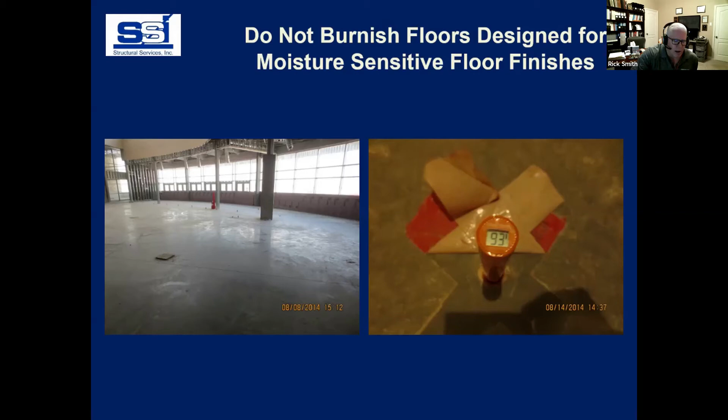This was a Nebraska Furniture Mart where they had applied a cure and seal product to the floor and hard troweled the concrete. The architect made a mistake. When I measured the relative humidity, we were at 93% RH, and that was after months of drying. So we had to take the cap off the floor.

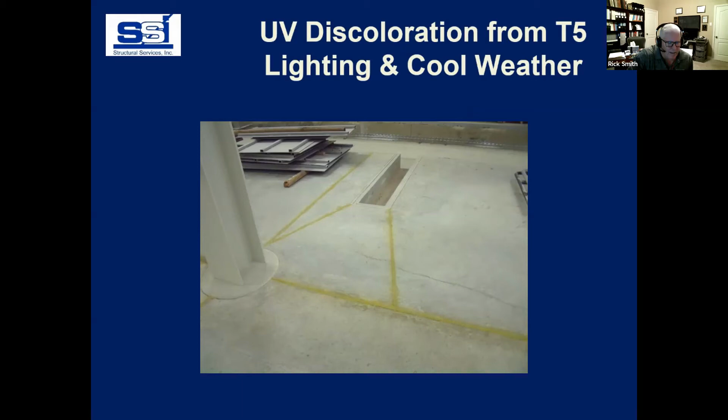We always fill our joints with a semi-rigid joint filler. Be aware that some of these epoxies can UV discolor, so you want to make sure you do a test application first. We never allow backer rods underneath the semi-rigid joint fillers.

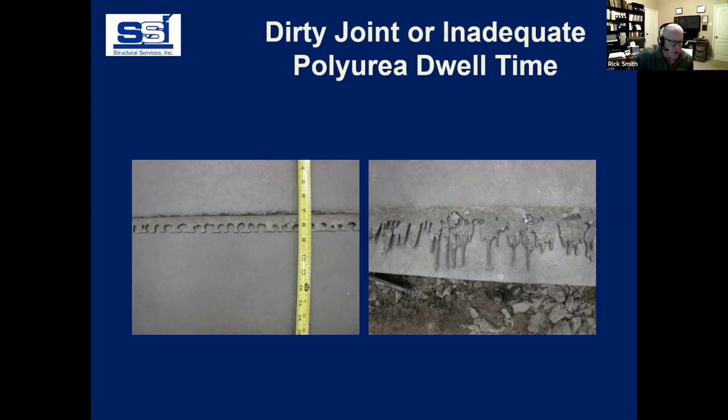More and more of our customers are pushing us towards polyurea joint fillers. Just be aware that these polyureas set very quickly, and the dwell time is so short that sometimes the joint filler does not get to the top of the saw cut shelf that we put in there. We call that the Glidden paint can effect. As a result, we need to make sure we slow those products down a little bit.

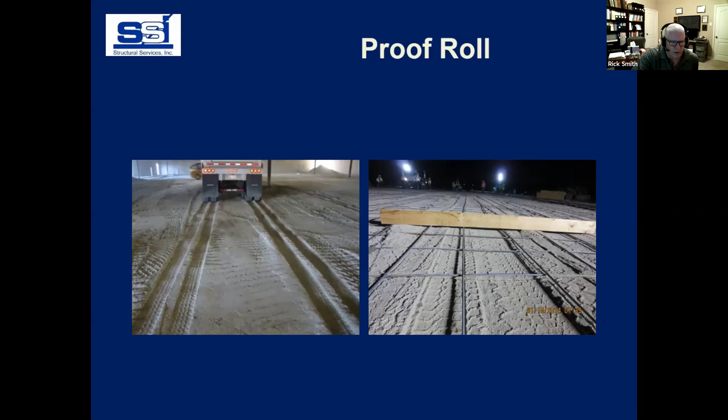I always do a proof roll on my slabs. If we have rutting of this nature, we haven't done an adequate job prepping our base. This is a project in Texas where they said, oh yeah, the pad's good and tight. We drove the concrete trucks in there, and that was it - we weren't even pouring the concrete yet. So here again, I would love to get your 304 crusher run down here in Dallas.

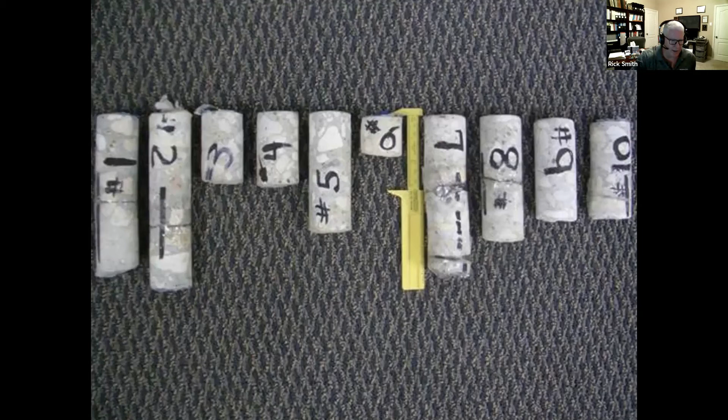Rutting like this will affect our slab thickness, which is problematic. This is actually supposed to be a 6-inch thick slab. We cored it 10 times, and those were the random cores we pulled out of the floor. We obviously have a rutting challenge on our hands. Anytime that comes up, I always use an impact echo device to measure the floor slab thickness - much cheaper than doing cores, and very effective.

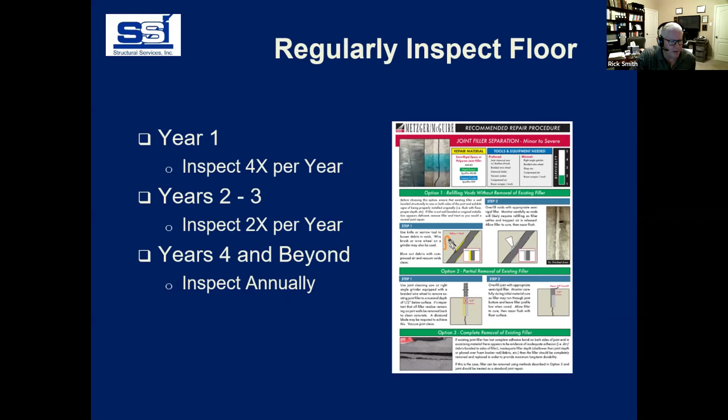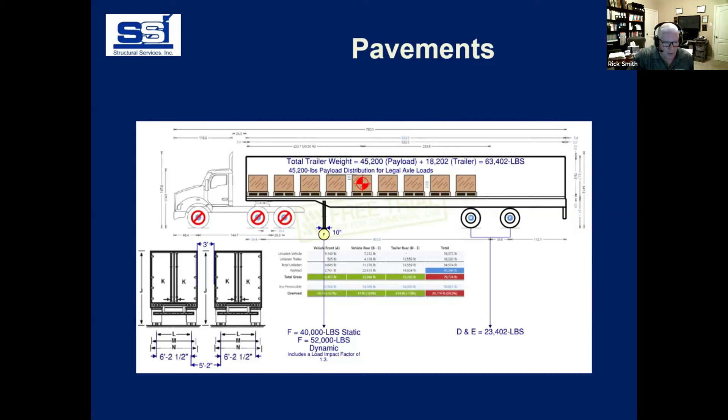So a couple of things to think about. One is, we do not include a dynamic load or an impact load for dropping these fully loaded containers on pavements. We're not using an over-the-road legal truck on a lot of these industrial sites. So check to make sure that you do not have these terminal tractors out here. Terminal tractors use hydraulics, and they may be a single axle that rapidly drops that container on the pavement.

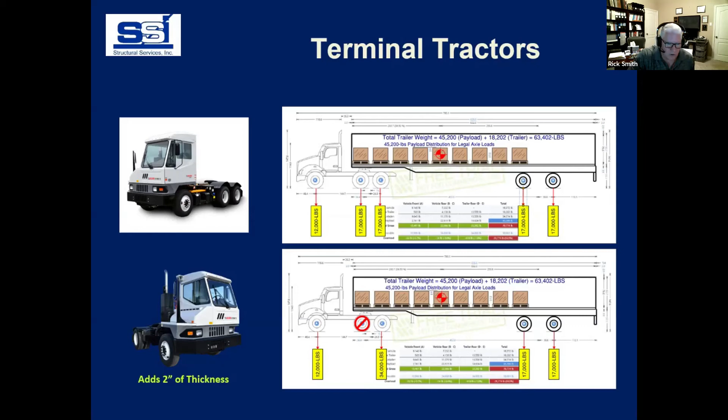Add in an impact factor of 1.3 to protect yourself from that. So instead of it being 34,000 pounds coming down on a dual axle, it's 34,000 pounds coming down on a single axle. That can add 2 inches of concrete to your design. So be aware that things are changing out there on our industrial pavements, and again, nobody sent us a memo.

Okay, I think I finished up in proper time. So Amy, I'll be happy to answer any questions you may have.